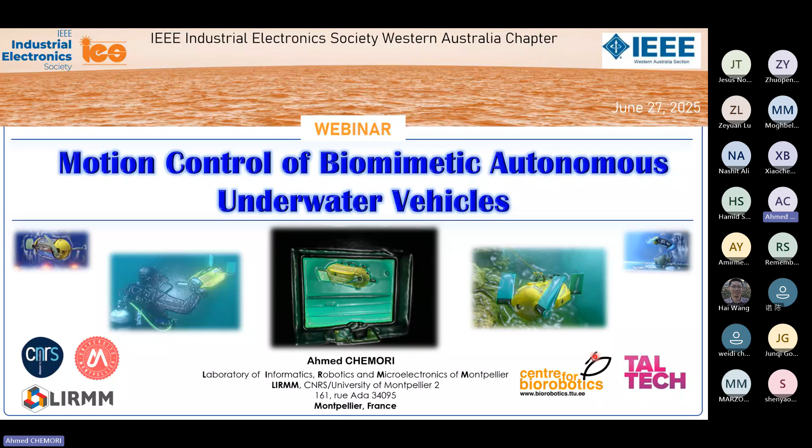The topic of today concerns motion control of biomimetic autonomous underwater vehicles. This work has been done in a joint cooperation between our university, our research lab, and Taltech University, exactly at the Center for Biorobotics in Taltech University in Estonia. So first of all, before starting the heart of the topic of today, let me introduce our research lab.

Then the second thing is that the Faculty of Medicine situated in Montpellier is the oldest faculty of medicine in Europe and maybe in the world. It was founded around 1220. And Montpellier is the seventh city of France, and we have a population of more than 300,000 people. A big amount of this population are students. We have two big universities, and the number of students in the city is more than 70,000.

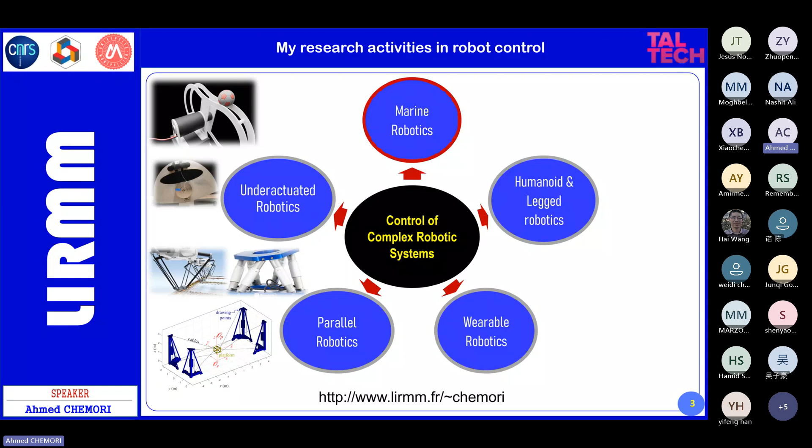Now we have some robotic systems that have fewer actuators than degrees of freedom, and the control problem becomes very challenging because these kinds of systems have internal dynamics which are unstable, and this creates non-minimum phase nonlinear systems, and they are very challenging to control. Here you have two examples of under-actuated robotic systems, the inertial wheel inverted pendulum and the butterfly robot.

The third application, and this is the topic of today, concerns marine robots in general, so surface vehicles and underwater vehicles. I'm interested mainly in control of classical propeller-actuated underwater vehicles like this one, and also in the class of bio-inspired underwater vehicles, and especially we did a lot of applications where we control the vehicle to do a cooperation between the underwater vehicle and the diver. And this is the topic of the lecture of today.

The fourth application I'm interested in: a few years ago, I worked on control of humanoid robots, and the idea is to reproduce human walking on a humanoid robot while managing the interaction between the robot and the ground, the kind of ground, the rough terrains, and so on. And recently, I have started working on this kind of robots. It's the case of quadrupeds working in extreme conditions, like, for instance, the task of making this kind of robot walk in a muddy environment.

And the last topic concerns control of wearable robots or exoskeletons. Also in terms of control, we have a lot of challenges, like we have to manage the interaction between the exoskeleton and the human. We have to manage the fact that the exoskeleton will be worn by a human that we don't know. We don't know, as you can see, the mass of the leg, the inertia of the leg, the friction. We have a lot of parameters and a lot of operating conditions that may change, and we have to take this into account in the control design. So whatever the control system we are interested in, for all those systems, we have a lot of challenges.

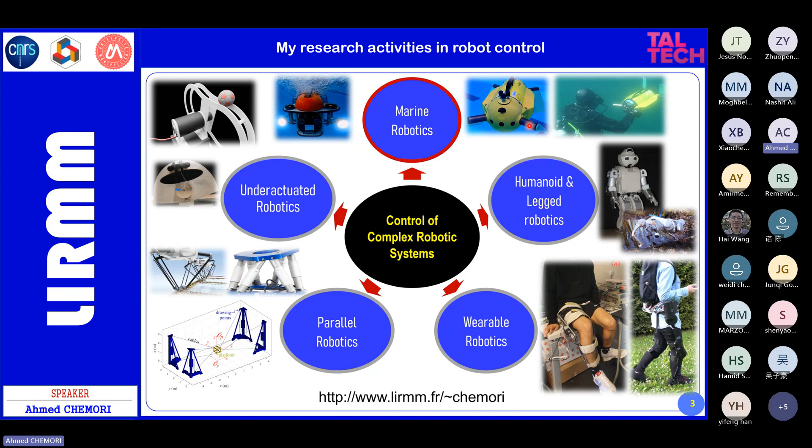This is why I am interested in control of this kind of systems, and also we try to find advanced controllers to control this kind of systems. So starting from now, I focus on the topic of control of underwater vehicles, specifically bio-inspired underwater vehicles. Here is the outline of the rest of my presentation.

We will start with an introduction where I will introduce basic definitions of bio-inspired robotics, and then bio-inspired underwater robotics. Then I will introduce our underwater vehicle, called U-CAT. I will explain from where UCAT has been designed, for which reason, which application, how UCAT is designed, the control system, the control inputs, the outputs.

And the sensors and actuators, and for which kind of applications we developed UCAT. Then the last part concerns the proposed control solutions. Here I will focus on 5 of them. The first control scheme is called priority-based control. Before presenting this control scheme, I will explain why this priority-based control, what is the motivation behind developing this kind of controller.

Then we will move to the second control scheme that we developed. It's called acoustic-based control, and here we will use feedback coming from the hydrophones on UCAT to follow an acoustic system, a pinger, in real time, and we will explain how the controller was designed and how it works.

The third control scheme, in this case, we used another sensor, which is the camera, and we designed a vision-based control. I will explain and show you a video how this control scheme works.

The fourth control scheme concerns data fusion, because when we designed acoustic-based control, we noticed we have some drawbacks and limitations of this control scheme. Then when we designed the vision-based control, we also noticed some drawbacks, and then we got the idea to combine both of them. This is why we called the proposed control scheme data fusion, where we did a data fusion between acoustic signals and images from the camera together in one control scheme.

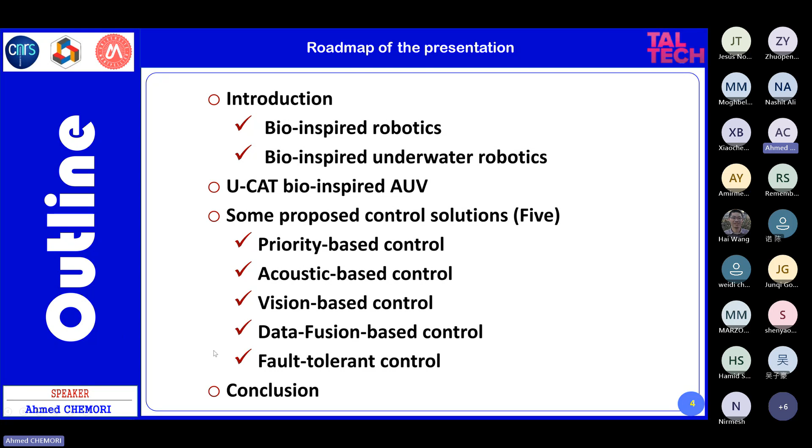And then I will give a short conclusion of my lecture. So let's get started. First of all, let me introduce, as I told you, basic definitions.

What is bio-inspired robotics? It's very easy to be defined. It's an interdisciplinary field between robotics and biology, and it includes mainly 2 broad areas. The first area is the area of biomimetics, and biorobotics modeling and analysis. So this is the first area, and this is the second area.

Let me explain further these two areas. Concerning biomimetics, what is the idea? The idea of biomimetics is to draw inspiration from biology. It means that we want to apply biological ideas and phenomena to resolve engineering problems in robotics. So this is the basic definition of the first area in bio-inspired robotics.

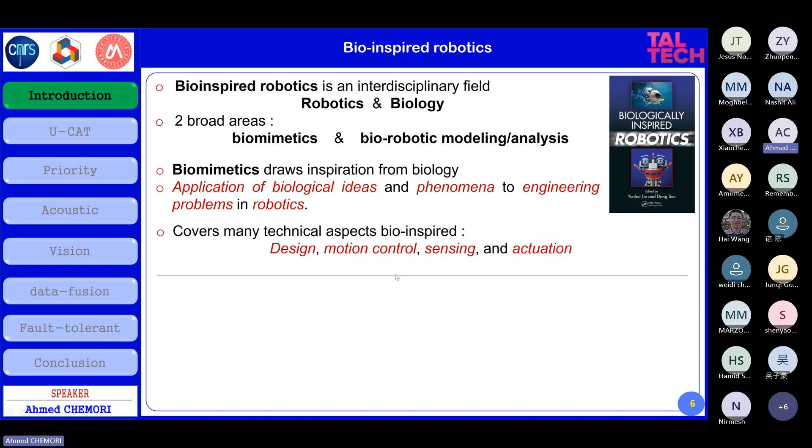And this area covers many technical aspects of bio-inspiration. So we can have bio-inspired design of our robot, we can have bio-inspired motion control, we can have sensors which are bio-inspired, and we can have actuators also bio-inspired. So this is the first area.

Now the second area: biorobotic modeling and analysis. The idea here is the application of robotic models and principles to address biological issues. Here it's the inverse. We will apply robotic models and principles to address biological issues.

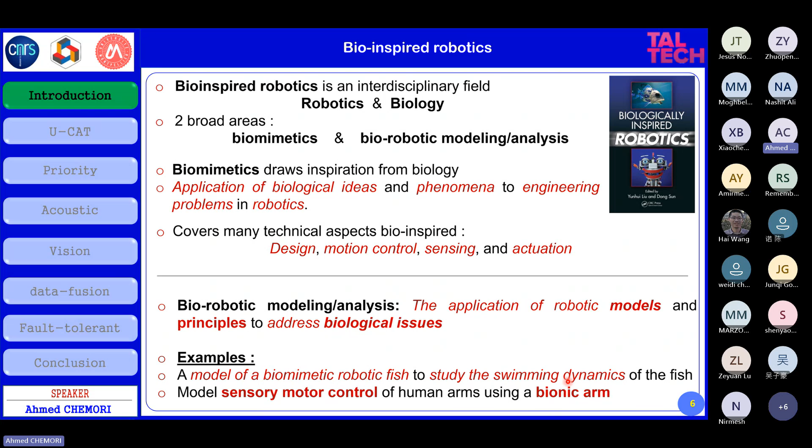Let me give you two examples to understand better. Imagine that you have a model of a biomimetic robotic fish, and we can use this robotic fish to study the swimming dynamics of real fish. So this is biorobotic modeling and analysis. Another example is to model the sensory motor control of the human arm using a bionic arm. So the tool here will be the bionic arm, and the idea is to model the sensory motor control of the human arm.

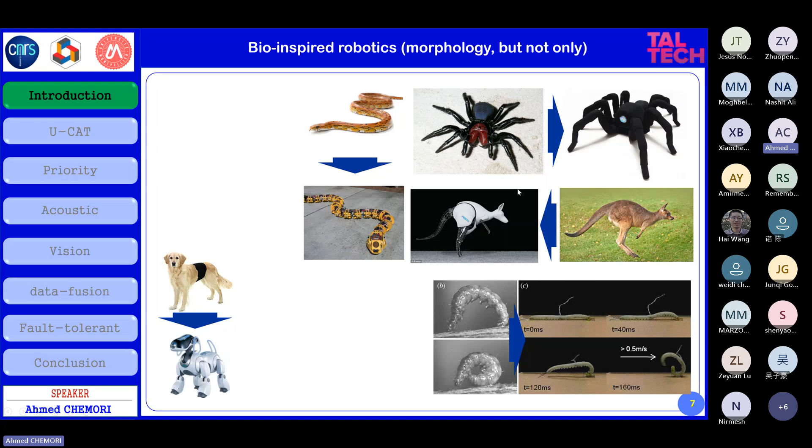We have a lot of examples, like this hopping robot. This is the real kangaroo, and this is the bio-inspired kangaroo. We have the general morphology, which is bio-inspired, but not only, because the actuation system in the kangaroo is based on the Achilles tendon, which is also bio-inspired. We also have some animals without limbs, limbless animals.

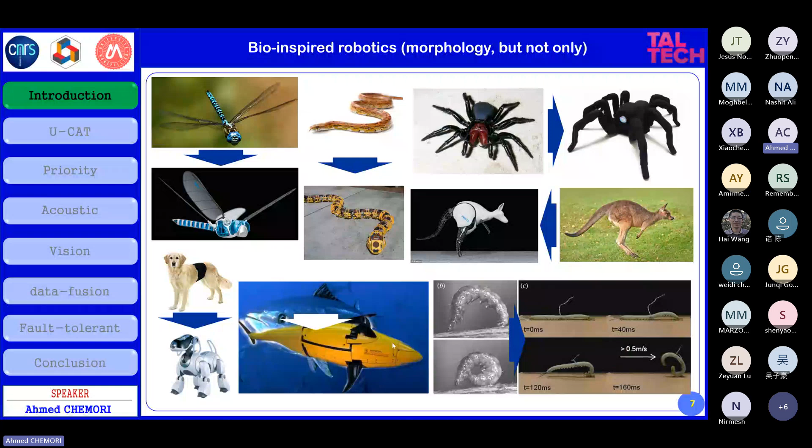We have flying robots, as you can see here. This is a dragonfly, which is bio-inspired. We have soft robotics nowadays, which is increasing in development, and we can see a lot of examples bio-inspired from insects and animals. And we can also have underwater bio-inspired vehicles.

Let me now give a definition of biomimetics. As I told you, biomimetics is one of the fastest growing topics in robotics, and it includes various bio-inspired aspects. We can design an underwater vehicle, or in general any robot, which is bio-inspired from a design perspective or point of view.

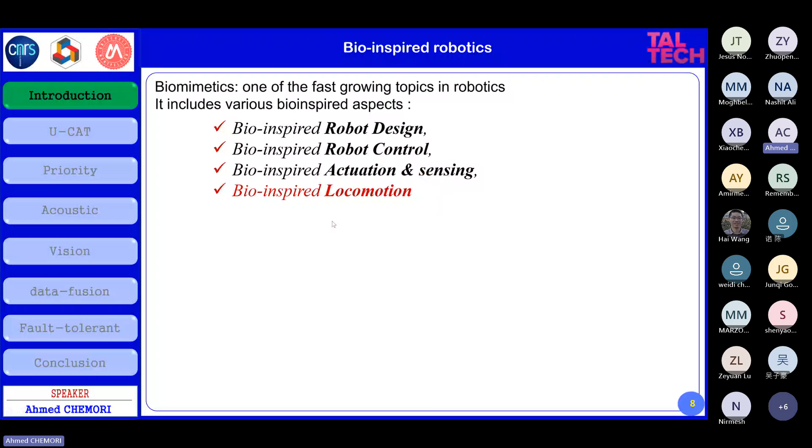We can also have bio-inspired robot control, so the controller itself can be bio-inspired. We can design robots bio-inspired in terms of actuation, in terms of sensing, or the last example here, locomotion. For locomotion, we can use this very simple classification of bio-inspired locomotion.

In locomotion in general, we have terrestrial, aerial, and underwater. Let me introduce the three of them. First of all, for terrestrial locomotion, humans created the wheel.

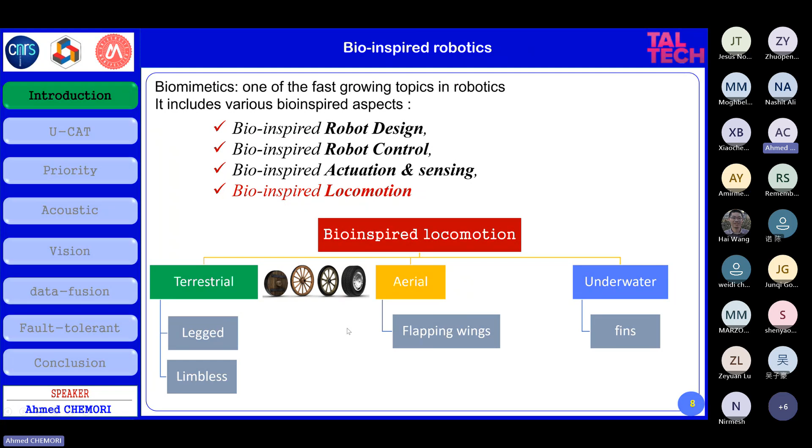Some examples of wheels are shown here, so we can use the wheel to move on the ground. However, if we are interested in bio-inspired locomotion, we forget about the wheel, and in this case we replace it by something else, like legs, as in animals, giving us legged robots.

Here we have an example of a quadruped, a robot with 4 legs inspired from quadruped animals. We can also have terrestrial locomotion based on a limbless design. Here there are no limbs, and by undulation of the body of the snake, or the snake robot, you get motion for this locomotion.

Let me now introduce the aerial case. For aerial locomotion, humans also created propellers, as you can see here with two examples. When we are interested in bio-inspired aerial locomotion, we forget both these classical propellers, and instead we use flapping wings.

Here you can see an example of a robot which is bio-inspired. The robot is equipped with two wings, and the idea is to control the motion of these two wings to control the motion of the body in the air to perform a specific task.

The last example I'll show is the case of today, underwater. For underwater locomotion, as I told you, humans created propellers, slightly different from aerial propellers in that there is an envelope around the propeller, giving better efficiency and better generated thrust or force used to control the vehicle.

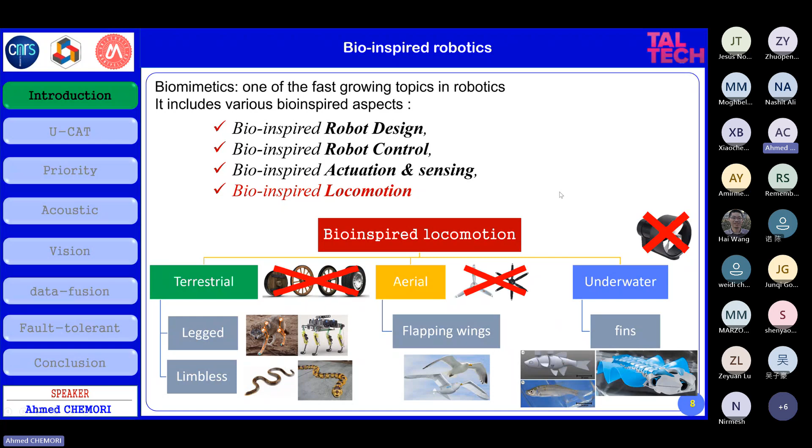After this short introduction, let me now introduce bio-inspired underwater robotics. Before introducing the bio-inspired underwater vehicles, let me just introduce this very simple classification of marine vehicles.

For marine vehicles, we have different kinds listed here. The first class is the class of ROVs, which stands for remotely operated vehicles.

For this kind of vehicle, we have the control system that stays on the boat. The human manipulates the control system, and the underwater vehicle dives to a certain depth. The key idea is that there is a cable, also called the umbilical, relating the underwater vehicle to the control system. You can see part of the cable here. So they are linked through this physical cable.

Why do we use this cable? We use it for two reasons. First, the control actions are computed in the control system on the boat, with the human manipulating it, and these control actions are sent to the actuators of the underwater vehicle through this cable. So in one direction, we send the control actions to the actuators or propellers of the underwater vehicle.

This umbilical is also used for another reason. The underwater vehicle is equipped with several sensors, and to get the measurements from the sensors on board the vehicle, we use this cable, or umbilical, as well.

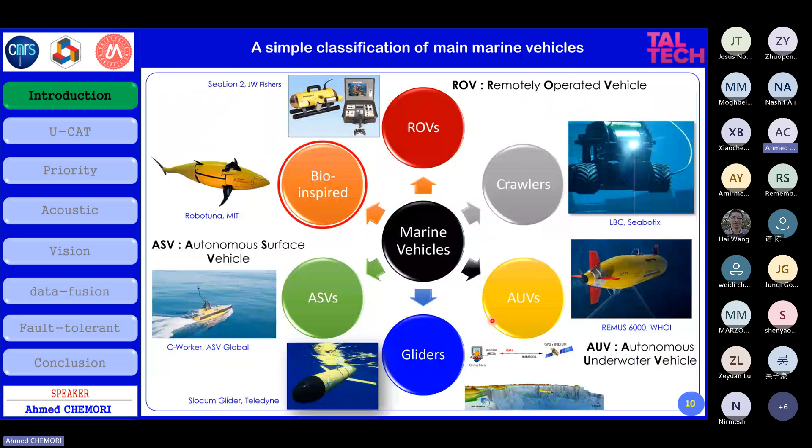However, if we look to nature, let me introduce four examples: the first is the sea turtle, the second is the sea snake, the third is the manta ray, and the last is the flying fish.

If you look at sea animals, none of them use propellers. Instead of propellers, the turtle uses 4 fins. By moving these fins, you can see how the turtle moves inside water, able to move in all directions with 6 degrees of freedom. It can even avoid predators by changing its motion abruptly.

Sea snakes, by undulation of the body, can have very smooth motion, and they can go inside confined environments.

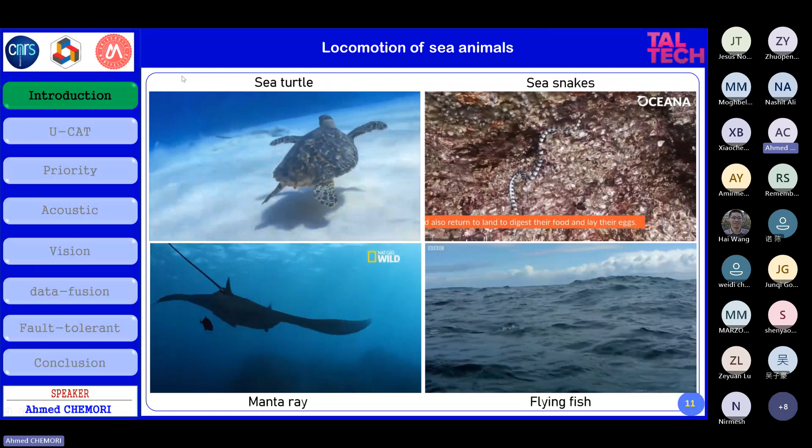The third example is the manta ray. Here the actuation is slightly different from the turtle because it's not using oscillating fins, but undulating fins. The last example, the flying fish, uses fins for both underwater movement and for flying. Now the idea is: why don't we design robots inspired from these sea animals?

Let me introduce the basic definition of bio-inspired underwater vehicles. A bio-inspired underwater robot is a robot designed based on biological ideas. As mentioned, it can be based on the design itself, the actuation system, the sensing system, and so on, and it's designed to address technological problems in robotics.

So what are the main features of a bio-inspired underwater vehicle? First, they may have a bio-inspired shape. As you've seen in some examples, the propulsion or actuation system can also be bio-inspired, as can the sensing and sensors.

We can find a lot of examples inspired from sea animals, including fish, turtles, eels, jellyfish, snakes, crabs, and so on.

Some of them, like snake robots, are designed based on a modular conception, because it's easier in this case: you construct a module, duplicate it, connect all the modules, and then control them to generate the motion of the underwater vehicle.

Some potential applications where these bio-inspired underwater vehicles are used: data collection, for instance measuring water quality, and underwater pollution detection, such as detecting pollution in a pipeline.

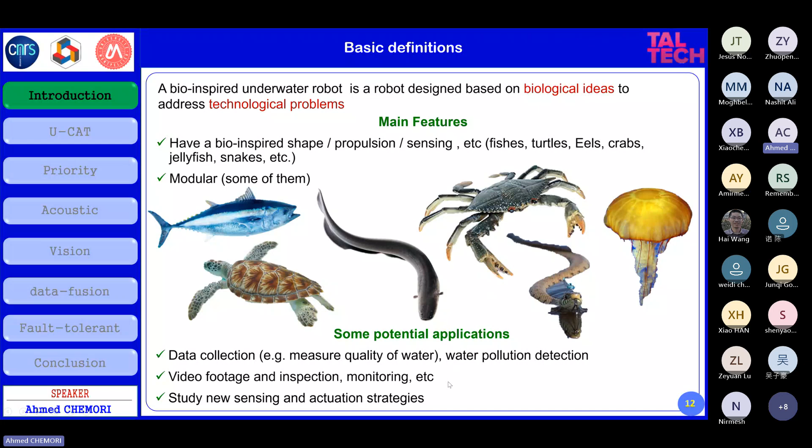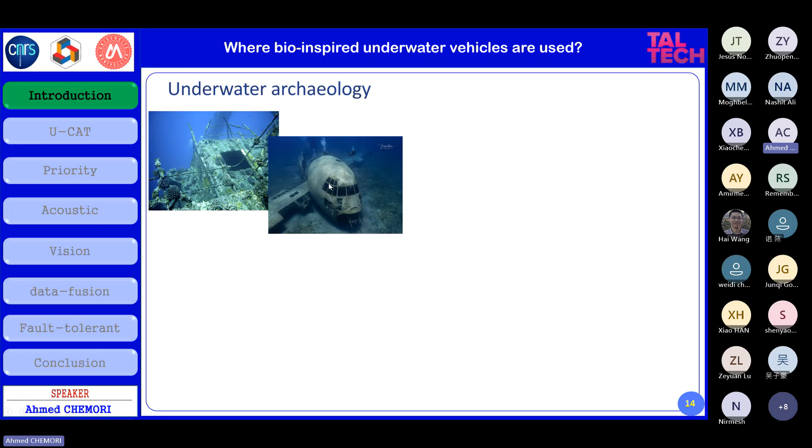The first application, as you can see here, is underwater archaeology. It means you have to go inside a shipwreck or airplane wreck, as you can see, inside water. It's very challenging to do this task because of a lot of challenges that I will explain later on, because actually in our vehicle U-CAT, we are interested in this specific application.

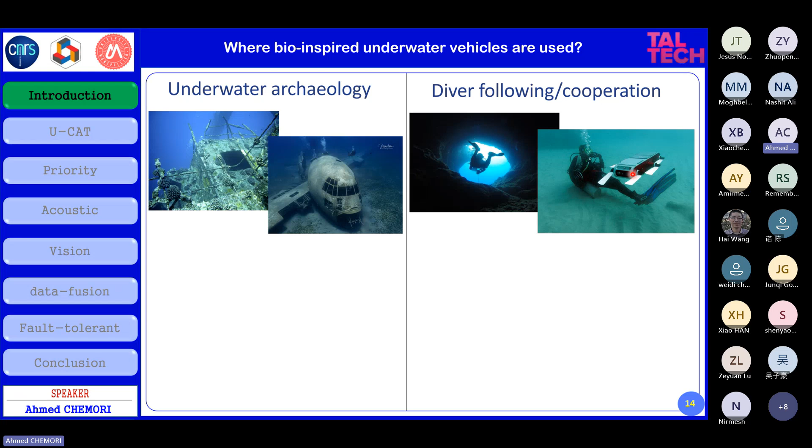A second application can be a cooperation between the bio-inspired underwater vehicle and a diver. It can be the cooperation or just simple following, so the diver is moving and the underwater vehicle should follow the diver in real time. This is the second application.

The third application is for fish monitoring and aquaculture applications. For instance, here you have a population of fish, and you can have a lot of problems. One simple question we may ask is how we can know the number of fish inside a specific area, how we can count them. Counting the number of fish is a problem, and as a solution, a bio-inspired underwater vehicle can be used to study the motion of the fish with less disturbance. Maybe we can design a bio-inspired underwater vehicle, like a fish-like underwater vehicle.

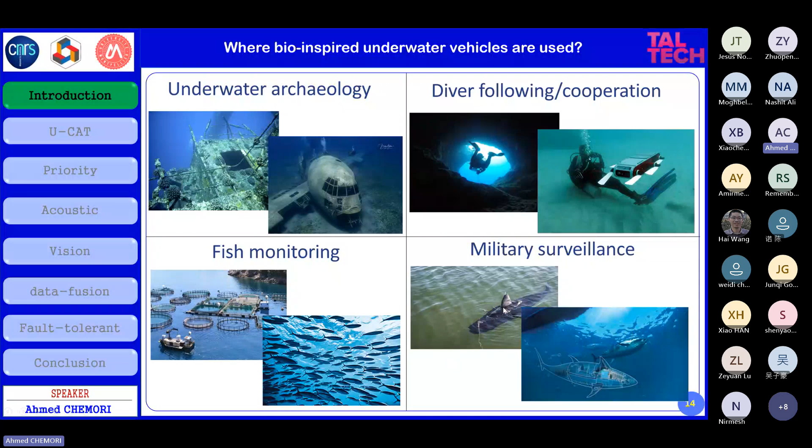The last application is for military tasks, like military underwater surveillance, for instance. We can also use bio-inspired underwater vehicles for this. After this introduction of the different applications, let me show you some examples of existing bio-inspired underwater vehicles.

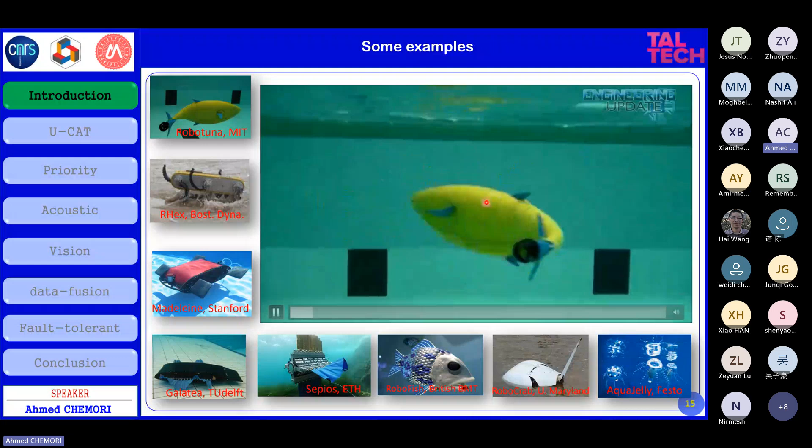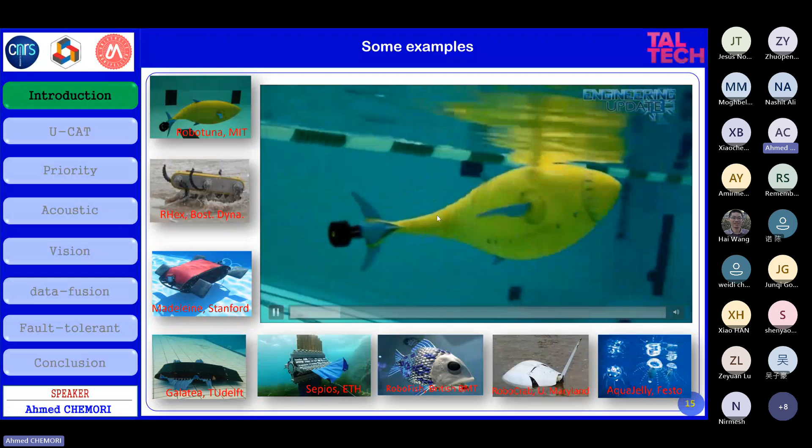As you can see, the first one is called Robotuna. Robotuna has the morphology of a fish, as you can see, with different fins and so on. You have to notice that the tail is flexible, and the tail is controlled to move to the right and to the left. Also, something we can see is the propeller at the end of the tail of this fish.

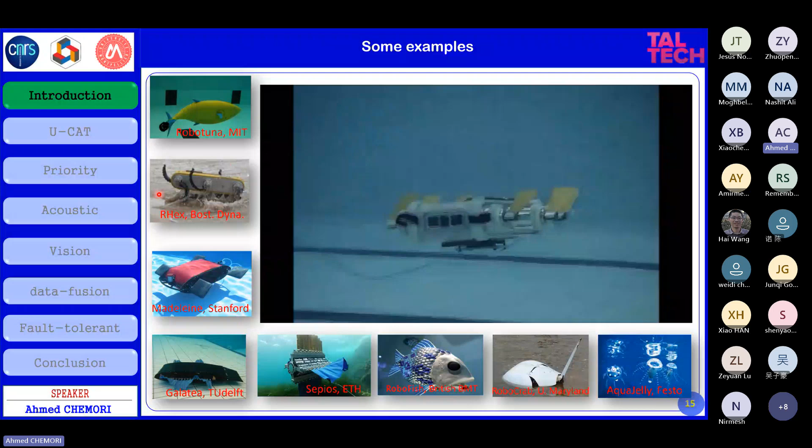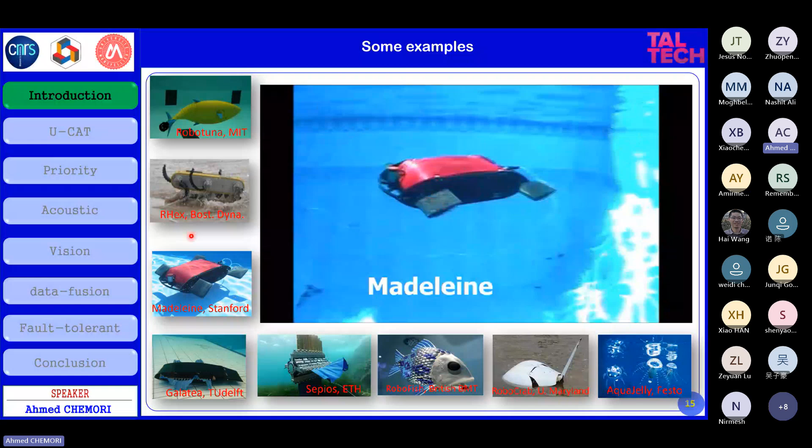The second example, from Boston Dynamics, is called RHex. RHex is an underwater vehicle with 6 propellers, and the propellers here are not the classical propellers, but it uses 6 fins. The next one, Madeleine, is from Stanford University, same as the previous one, but here it uses 4 fins, and they are rigid fins, controlled to control the motion of the underwater vehicle.

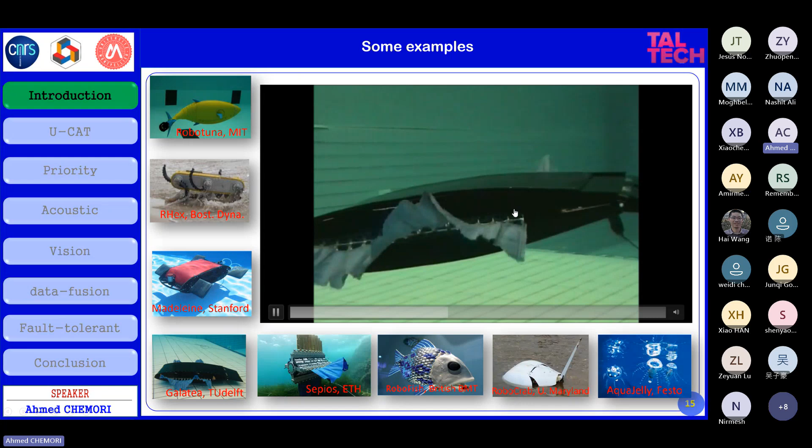The next one is called Galatea from Technical University of Delft in the Netherlands, and this is what I explained to you before, the undulation fins. The fins are undulating like that, and then if you want to control the motion of the vehicle, you want to go faster or go slower and so on, you may change the parameter of this undulation.

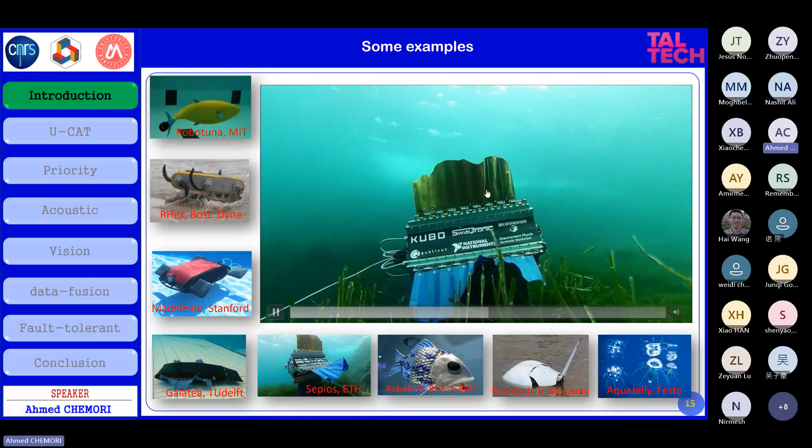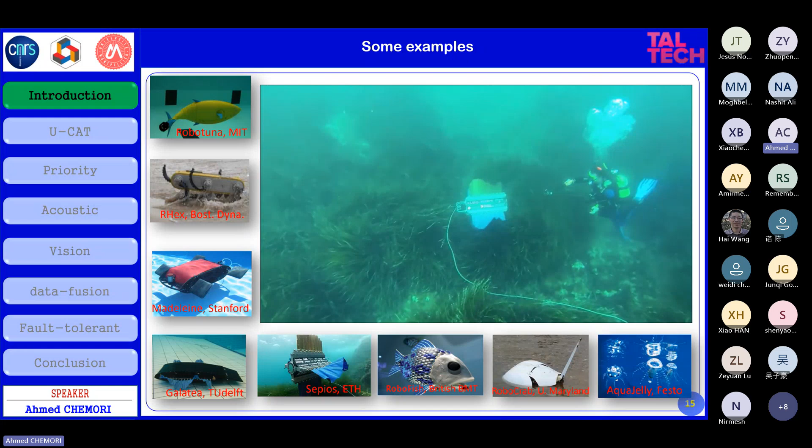Here, the next one, Sepios, also from ETH, the same concept, and it uses 4 undulating fins. And as it will do the same, you want to go faster or slower, you can change the parameters of oscillation of these fins. It can be like the frequency of oscillation, or it can be also the amplitude. So these 2 parameters can be used to control the motion of the vehicle.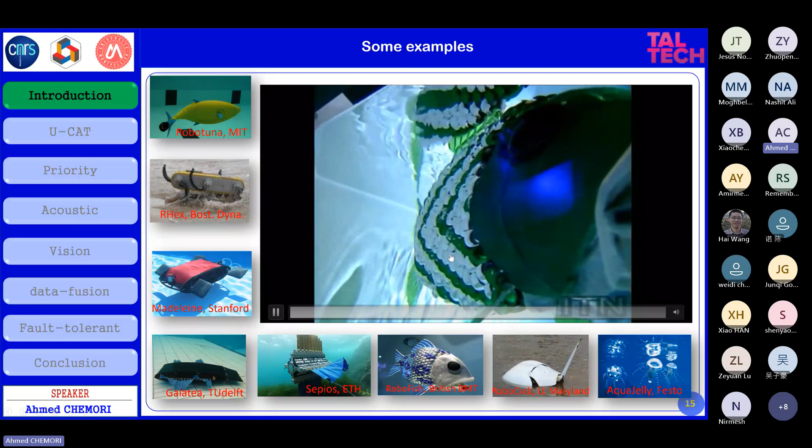The next one, RoboFish, here, as you can see, it's like Robotuna. It has the morphology of the fish. It has a tail. The tail is flexible also. It can move. It's controlled to move to the right and to the left to push the vehicle in the desired direction. And then depending on the application, you may put a camera here, for instance, to take pictures or take videos.

And the next one is RoboCrab, and this is an amphibious underwater vehicle, because as you can see here, it is able to walk on the ground, and it is also able to swim or to dive inside water. This is why it is amphibious. And in terms of control, in both mediums, it's not the same technique that we may use.

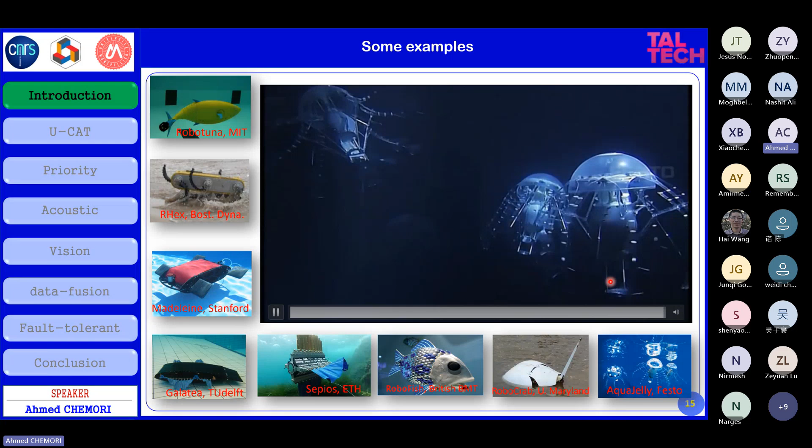Here, the last example, AquaJelly from Festo. This is a bio-inspired underwater jellyfish. And as you can see, its actuation system is very simple. Here, an actuator that moves to the top and the down, moving the different fins of the vehicle to move inside water. Now, let me move to our underwater vehicle.

So our underwater vehicle, as I told you, it's called UCAT, and UCAT was designed a few years ago at the Center for Biorobotics in Estonia at TalTech University within this European research project called ARROWS. So the motivation behind this design was mainly for archaeological applications. So the idea is to go inside the shipwreck and take pictures, videos, and do the inspection of a shipwreck, for instance. So this is the main application of UCAT.

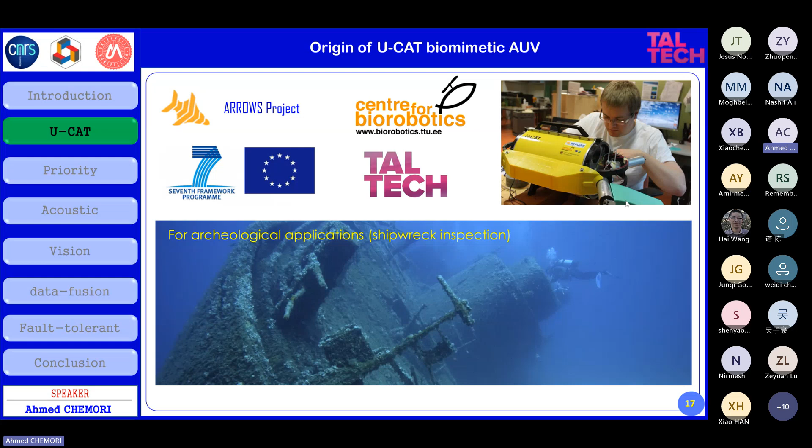So what does this mean? What are the consequences if you are interested in a shipwreck inspection? And what are the constraints that you have to take into account in the design and control of this underwater vehicle in its actuation system because of this specific application? I will say a few more details about this.

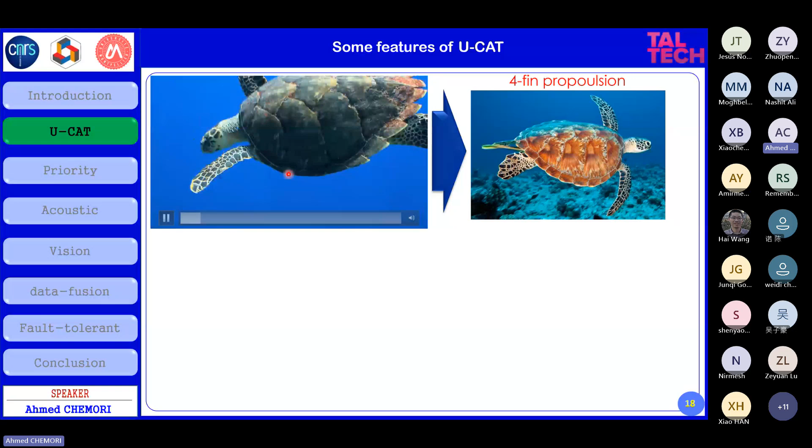So first of all, UCAT is bio-inspired. We got it inspired from the turtle. As you can see, a turtle uses 4 fins as a propulsion system, and we want to do something bio-inspired, turtle-like. So we don't want to use classical propellers for certain reasons that I will explain, and we designed UCAT, and this was the obtained result of the design.

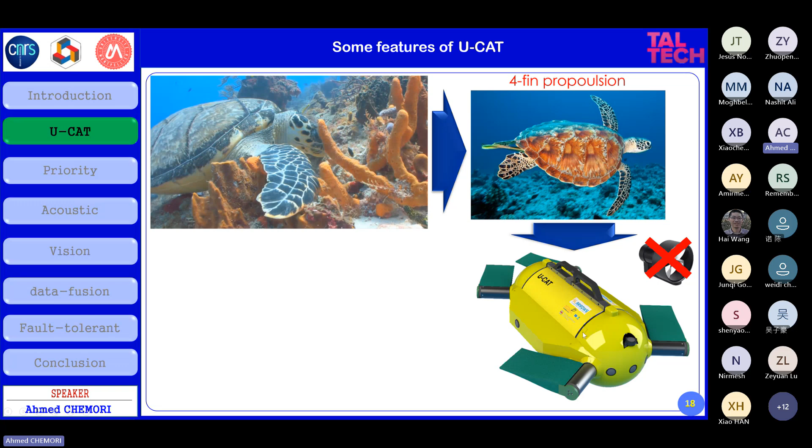As you can see here in yellow, the body of the vehicle, and in the green parts are the fins of this underwater vehicle. And the fins are actuated by motors inside the vehicle, and then we control the oscillation of the fins to control the motion of the underwater vehicle. Some technical features of this underwater vehicle.

First of all, as I told you, why we designed this vehicle, why we have been interested in controlling this vehicle. Mainly the targeted application was underwater archaeology, and specifically we want to do inspection. So the robot is not equipped to do underwater manipulation. It's equipped just to do underwater inspection. And mainly we can use the camera or the video to identify objects of interest.

In the design itself, as I told you, regarding this underwater archaeology application, we had a lot of constraints. And one of the constraints is the size of the underwater vehicle. So the vehicle should be small, because we have to go inside the shipwreck, a confined environment, and we have to pay attention regarding this. If you design a big underwater vehicle, it will not be possible to go inside the confined environment. This is the first reason. The second one, it should be highly maneuverable to change the direction, to change the orientation very quickly.

So this is needed also for this kind of application. Then another constraint regarding the design of the vehicle concerns the actuation system. As you can see here, we don't want to use classical propellers. Why are classical propellers not a good solution for this kind of application? Because they restrict the visibility near the bottom. I will show you a video to show concretely the difference between actuation based on a propeller and actuation based on fins in the next slides.

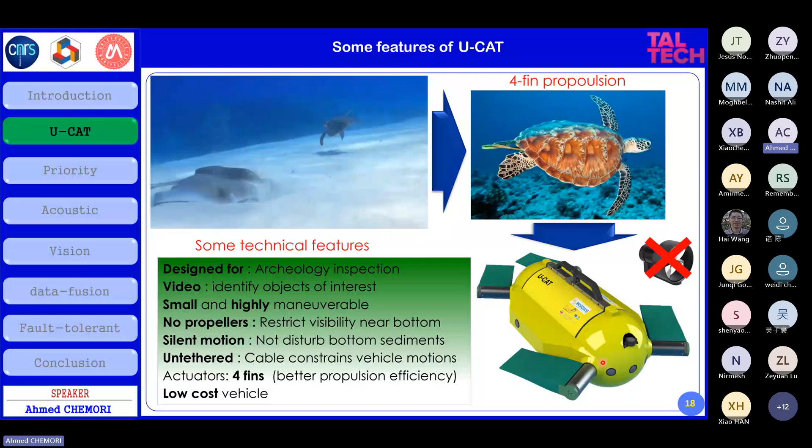In this case, we have an AUV. It's an autonomous underwater vehicle, and it is fully embedded, fully autonomous. In terms of actuation, as I told you, we have 4 fins, the green parts here, actuated by motors, and I will give you more details about this in the next slides. Now let me introduce the actuation and sensing of this underwater vehicle.

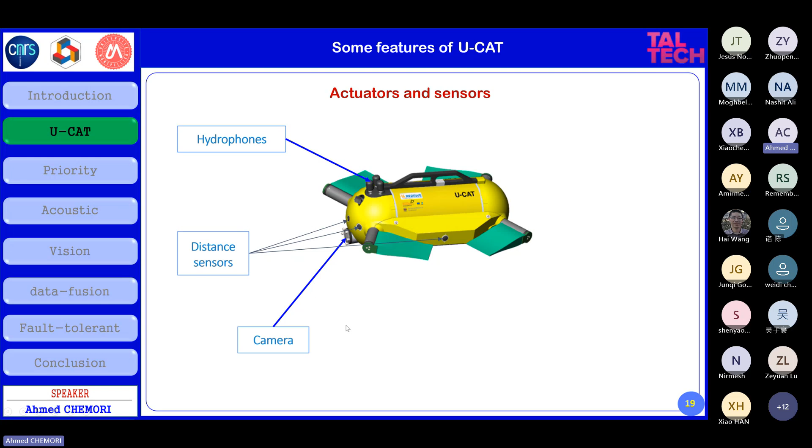In terms of sensing, the robot is equipped with 3 hydrophones. Why hydrophones? Hydrophones are used for underwater acoustic communication. I will show you some scenarios where we did acoustic-based control. We used these 3 hydrophones to control the underwater vehicle. I will give you more details in the next slides. Then the vehicle is equipped with some distance sensors. It is equipped with a camera to take videos and pictures of objects of interest, and also different kinds of sensors.

We have the IMU. The IMU is the inertial measurement unit, and it's used to measure the orientation of the vehicle: roll, pitch, and yaw. It is equipped also with other sensors, like for the depth, which is a state that we need to control and measure in real time. In this case, we use a pressure sensor to measure in real time the position of the vehicle underwater, and other sensors like temperature or humidity sensors.

In terms of actuation, we have 4 DC brushless motors used to actuate the four fins of the underwater vehicle. We also have inside the vehicle a buoyancy control system. We can change the buoyancy to go to the surface or to go down. In the actual controllers that we proposed, we didn't use it yet, but the initial design of UCAT includes this buoyancy control system.

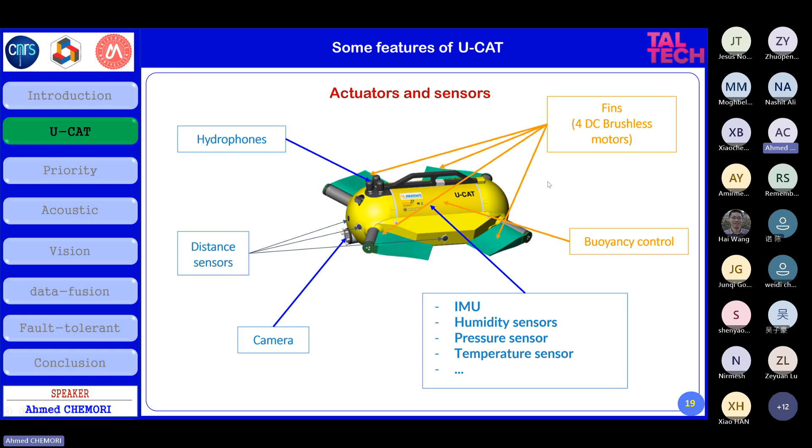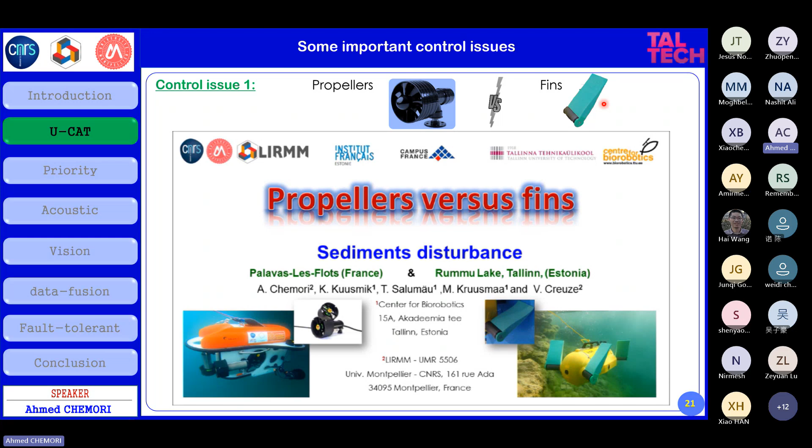Now, what we have proposed as control solutions. Let me show you, first of all, some control issues. The first control issue, as I explained before, is the actuation of the system itself. We want to control some organs in the vehicle. We had the choice between using classical propellers or using fins. Let me show you our design, why we chose fins instead of classical propellers. The video here compares classical propellers to fins.

Here we have another underwater vehicle, an ROV, and it uses classical propellers. We did this diving task near the harbor, and see here the sediment disturbance. If you use a camera here, you cannot see anything. This is very bad for camera-based underwater inspection, and this is the reason why we don't use classical propellers. Instead, we use fins.

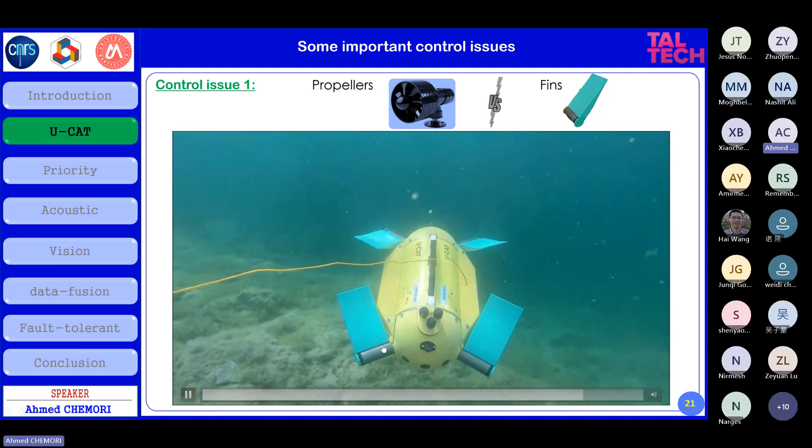In this sequence, as you can see, UCAT is diving very close to the bottom, to the seafloor, and there is no sediment disturbance, because the motion of the fins is not disturbing the sediments. This is the first thing to keep in mind. We are using fins to avoid disturbing sediments, but not only; we have other reasons for using fins, like energy consumption. We never proved that this kind of underwater actuator is better in terms of energy than propellers, but it's possible to prove this.

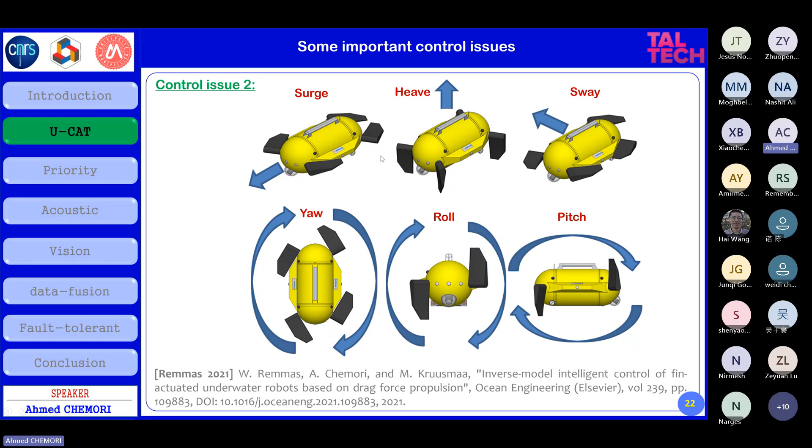And the question that I may ask: how can we control 2 or 3 or 4 degrees of freedom at the same time, because here I illustrate the control of each degree of freedom alone. If I want to control the surge and the heave at the same time, how will I orient the fins and how will I control the fins to go in the good direction to follow the predefined trajectories? And this is a challenging control problem.

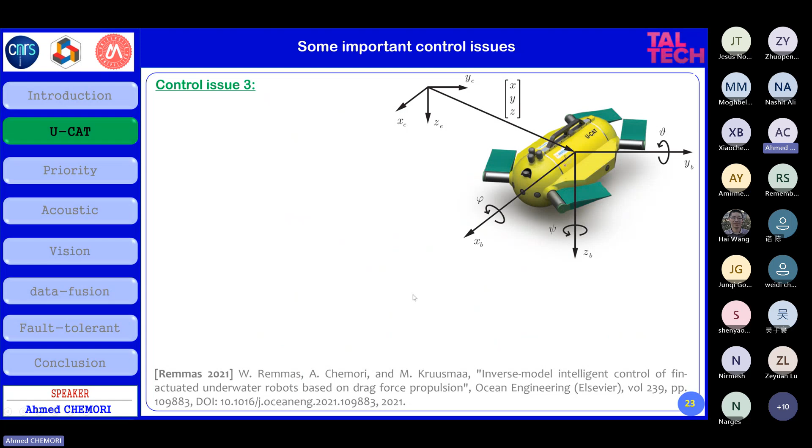The third control problem concerns the fins themselves, because for a classical propeller, we can find in the literature a very nice, precise model of these underwater propellers. However, for our case, using fins like that, the model may be very difficult. The model of the vehicle itself is easy; we can find it in a textbook of marine robotics, the model of an underwater body like that of the vehicle. However, the actuation itself using fins is very difficult.

Very difficult, why? Because actually the fin itself is not rigid, it's flexible. And if you want to take in this flexibility to have a nice, precise model, you need to use, for instance, the finite element method. But the consequence is you have a very precise model, but its complexity will be very huge, and it will not be possible to integrate this model in real time for the control of the vehicle. However, we can use a very simple model by neglecting a lot of things, neglecting flexibility, for instance. You have a very simple model, but it will not be very performant.

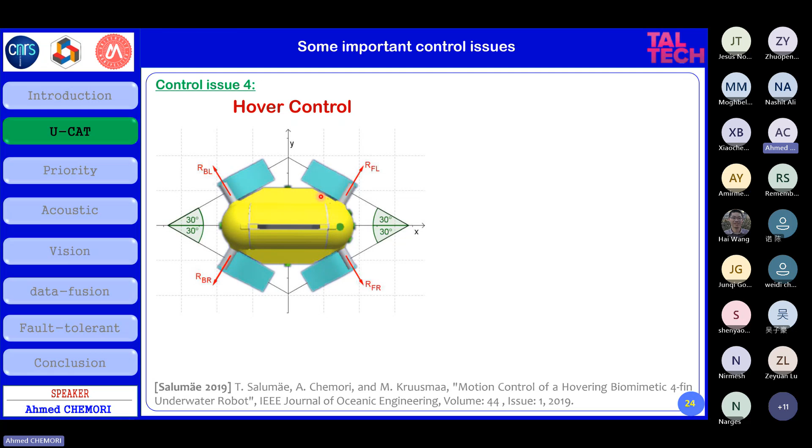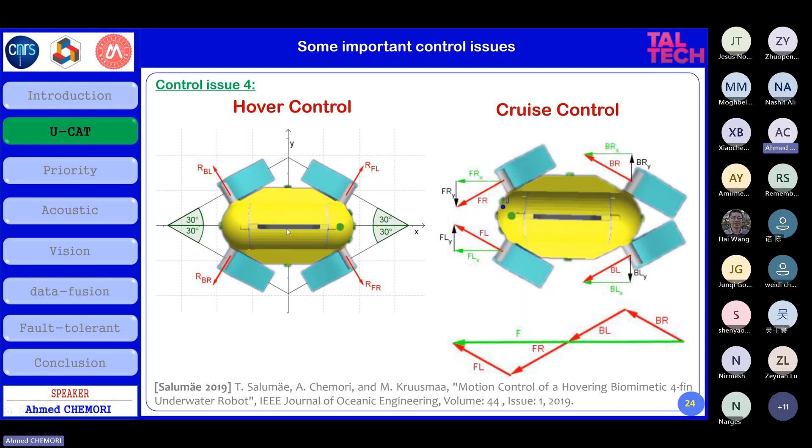The cruise mode is used mainly to move for long distances, like for search, because the generated force or thrust from all the fins, rear and front, is bigger. However, the hover mode is well suited if you want to stay around a specific position, like for dam inspection, for instance—you want to stay in front of the dam to take a picture or video, and remain stable around this position. In this case, the cruise mode is not possible, since it's designed for continuous motion along the surge. However, with hover mode, we can stay around a specific position with precision.

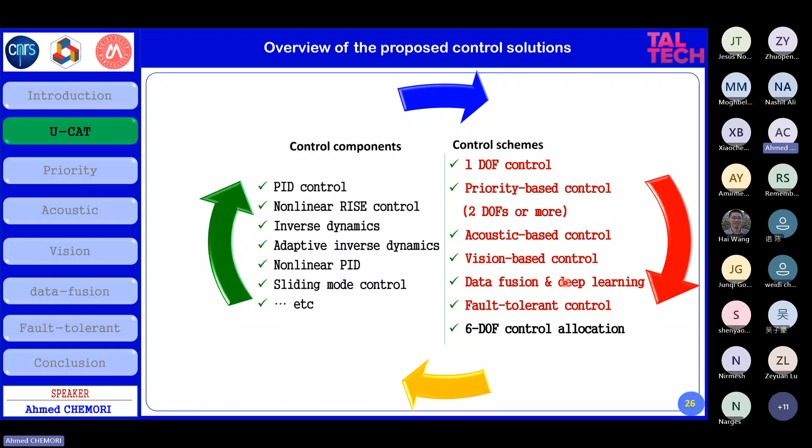Now, in terms of control solutions, we designed several approaches. We started with control of 1 degree of freedom—designing different controllers, which is not very difficult. Then we tried to tackle controlling more degrees of freedom, starting with priority-based control that enables controlling 2 degrees of freedom or more. After that, we used the sensors on board the vehicle for feedback control, including acoustic signals, vision-based signals, data fusion between them, and finally fault-tolerant control.

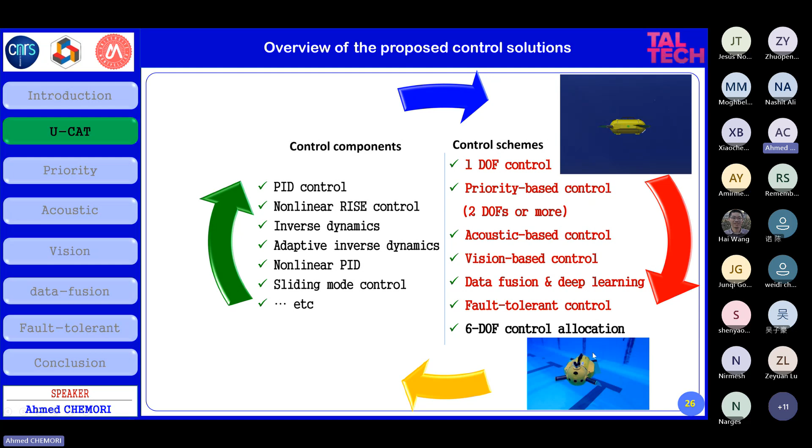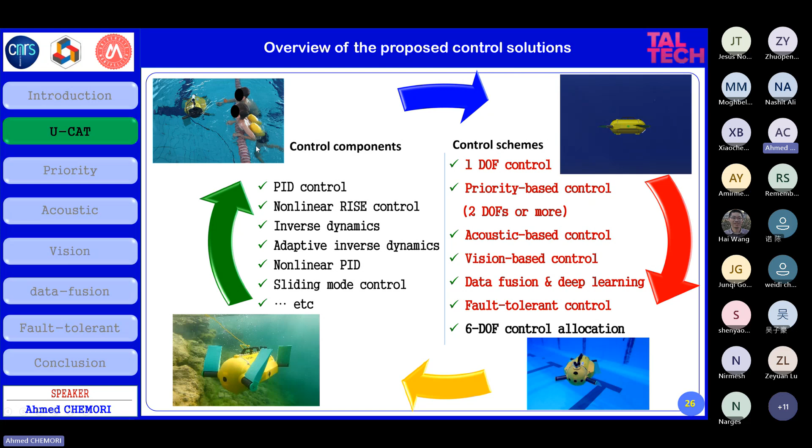We did another work, currently under progress, where we control all 6 degrees of freedom. We first did simulations to validate the control schemes in a robot simulator, then conducted experiments in a controlled environment in the pool, and later in open water. To show that the robot is human-friendly, we organized a day for kids, and they were swimming near the robot without any safety problems.

Now let me show you some of the experimental results we obtained. First, this is control of the vehicle using a joystick—an open loop control without any controller inside, just a human manipulating the joystick to control the motion of the vehicle. Here you will see an illustration of the different degrees of freedom, the motion, the different orientations, and how the vehicle moves, especially the consequences of this kind of open loop control.

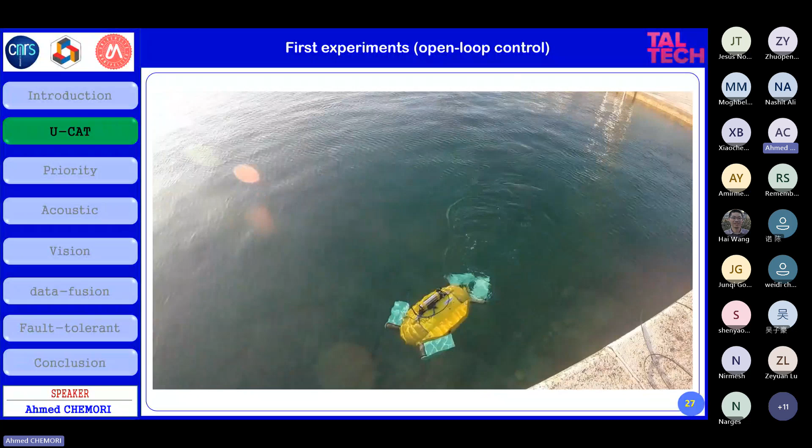Look here, this camera is on board the vehicle, and when the vehicle is moving, you can see that the roll is not very stable. The roll is not very stable for a reason. Here, in the illustration of the different degrees of freedom, we are moving along the y-axis.

We change quickly, the orientation is highly maneuverable. Now we are rotating around the z-axis, for instance, by moving the fins of the vehicle, and we have different illustrations. Now, the problem of the roll, why the roll is moving like that, as you can see, because actually we have the fins, the right side, the left side fins.

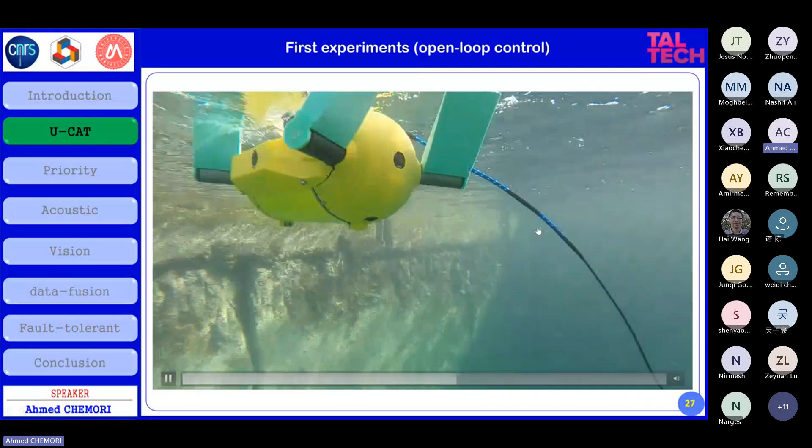Here's, as you can see, the human using the joystick, controlling the vehicle, and you can see the obtained motion. And as I told you, the problem of the roll instability is coming from no synchronization we did between the right and left fins. So without any synchronization, the problem is we obtain a roll of the body of the vehicle which is not stable in the roll degree of freedom.

Here you can see that the fins of the vehicle are flexible. As you can see, they are not rigid, so they are flexible, and this is the obtained motion.

So after this open loop control, let me show you a closed loop control. We started with the control of 1 degree of freedom. As you can see here is the control of the depth, and we did the experiment in a swimming pool.

As you can see, the perfect motion of the vehicle vertically to the top and to down also, by controlling the fins of the vehicle. And as you can see, the roll of the vehicle is very stable. The reason behind this is that we did a synchronization between the right and the left fins of the vehicle. This is how we obtained this stable vertical motion.

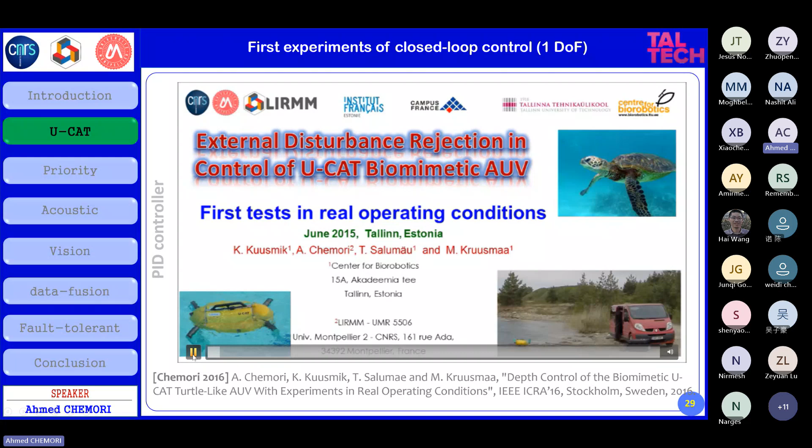So after controlling the vehicle in 1 degree of freedom, we started doing experiments first in open water. We did some experiments in Estonia here, as you can see, and you will see that the working conditions or operating conditions are much more challenging than the previous case in the swimming pool.

As you have seen, the visibility was very good in the pool. However, here the visibility, as you can see, it's not so good. We have different particles inside the water, the visibility is not good, and so on.

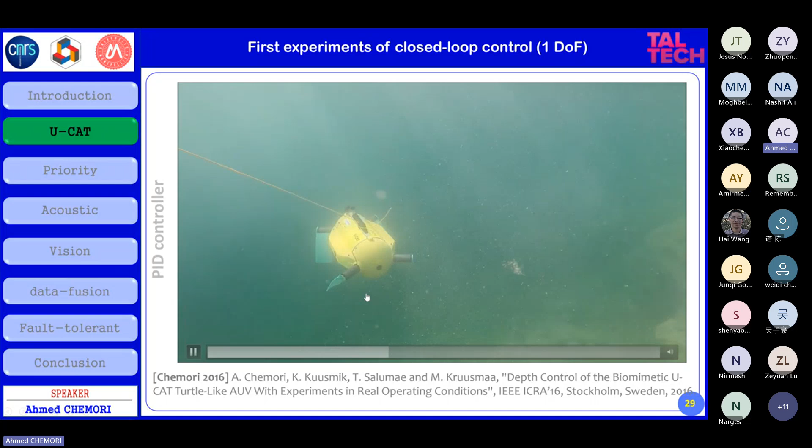So we go from the surface to a certain desired depth. If you want to go down, you orient the fins in this direction and control the oscillation. If you want to go up, you have to orient the fins down like that. If you arrive at the desired depth, which was around 2 meters, the orientation will be horizontal. Horizontal orientation of the fins means that the tracking error on the depth is near zero.

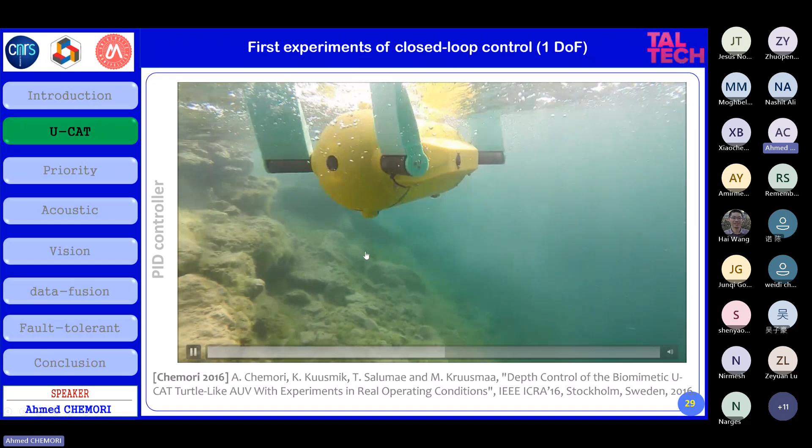Here we disturb the vehicle, applying first an external disturbance. The yellow part you see here, the yellow cable, is not umbilical, pay attention. It's just a wire without any electronics inside, no control signal, nothing. It's just to disturb the vehicle, the first reason, and the second reason is to avoid losing the vehicle inside the lake where we did the experiments.

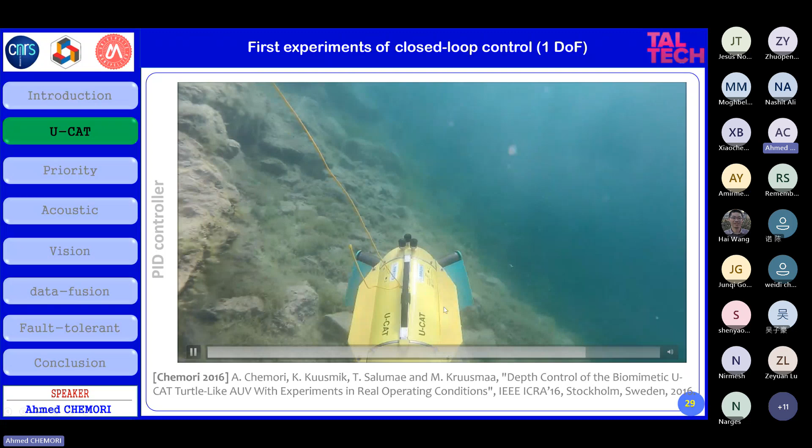So we apply this disturbance here. It goes back around the desired value, and this is just to show that the controller is able to reject this external disturbance.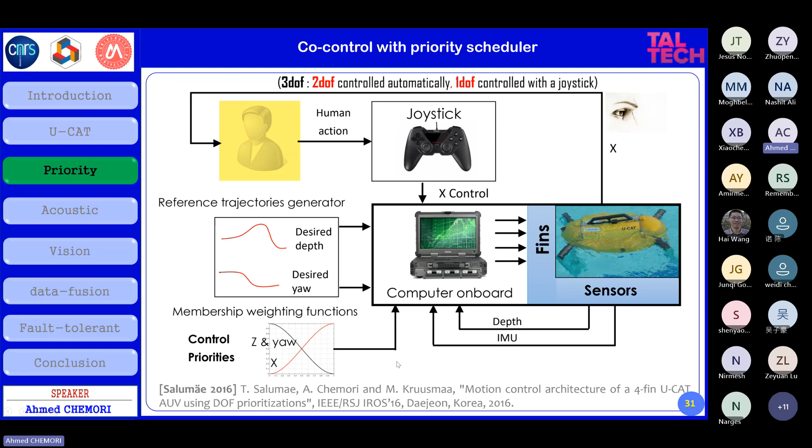For the controller, we use nonlinear feedback gains that are summarized here. The obtained results show a trajectory tracking, this is the trajectory tracking that we designed here, as you can see.

So we did 3 control modes. The first one is manual control, where we ask the human to follow this predefined trajectory approximately, and the human is manipulating everything - the robot is manually controlled by the human. Then we try to reduce the intervention of the human. In this case we add a depth autopilot, meaning the depth is controlled automatically, and the human is controlling just the yaw. The last one is the depth and yaw autopilot, so both are automatically controlled. As you can see, the tracking is much better in the third, autonomous case.

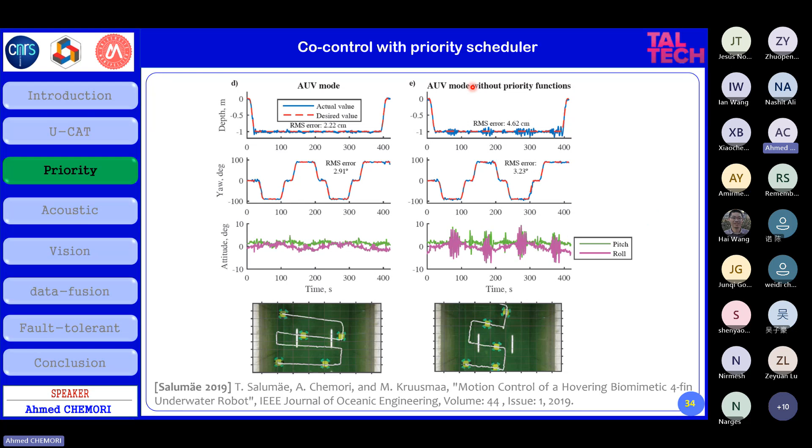This shows what happens if we add or don't add these priority functions. Without the priority function, the tracking error is worse than the case where we take them into account.

Then acoustic-based control - the idea is to use the 3 hydrophones of the underwater vehicle to follow a pinger. We did different scenarios: a static pinger, then a moving pinger. We give the acoustic pinger to the diver who will move, and based on this measurement, we try to follow the diver in real time. Let me show you the obtained results for this scenario.

So here we ask UCAT to follow the diver. The diver is moving here. We use the measurement from this pinger - it's the yellow part held by the diver. And the diver is moving. As you can see, UCAT is controlling the depth and the yaw and the surge to follow the diver in real time. The diver is moving and UCAT is following the diver in real time, thanks to this feedback from the acoustic signal.

However, what we noticed here is the problem of precision of tracking, because we cannot have good precision of tracking using this acoustic signal.

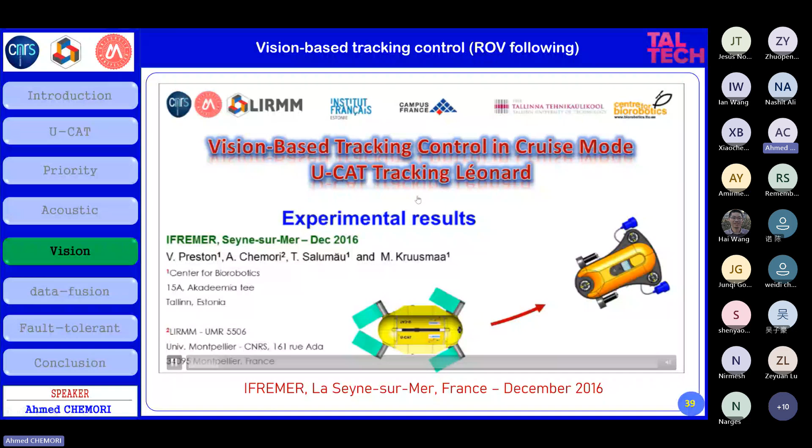Then we tried another measurement, which is the camera. Based on the camera, we designed a vision-based tracking controller. Here, the scenario is an underwater vehicle moving, and UCAT is using just the camera to follow this moving underwater vehicle. The big challenge here is we need to keep the first vehicle, the target, inside the field of view of the camera.

The big challenge is if the first vehicle is turning to the right or the left, we may lose it very easily outside of the field of view of the camera, and in this case we cannot do anything. This is why we need to design a controller that's very reactive, such that when the target starts moving to the right or the left, we have to turn quickly to avoid losing the target in real time, and we succeed in doing this tracking. So it has good performance in terms of precision, with the camera.

However, the problem is this: if it is outside of the field of view, or if the target is far away from the vehicle, or if the visibility is not good, the camera is not suitable.

Then we designed the data fusion controller, and here we tested using both. It means that if we can see the target in the field of view of the camera, we'll use both the acoustic signal from the pinger and the camera. If the target is outside the field of view, or far away, or the visibility is not good, we'll rely only on the pinger, the acoustic signal. Then you can switch between them depending on the situation in real time.

Here we tried the following: we try to follow the diver, as you can see, and once the diver is outside the field of view of the camera, we stop the experiment because we cannot continue. We don't have any further information. So this is the visual tracking.

The last scenario here is fault-tolerant control. In this work, we suppose that one of the fins is not working. We stop one of the motors and keep just three working, and we try to follow an elliptical trajectory like that here, combining the PID controller and the sliding mode controller.

Just one note regarding the tags you can see at the bottom of the pool: they are used to measure or localize X and Y, so the surge and the sway, the position in X and Y of the robot. This is why we use these tags and the camera of the vehicle, so we can know the XY position of the vehicle. The depth and the three angles are measured using the pressure sensor and the IMU.

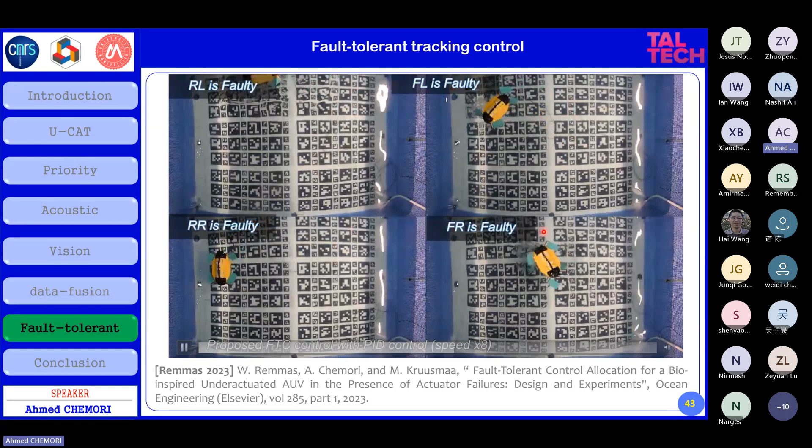And here we do the tracking. Now for control allocation with the PID, it depends on which fin is faulty: the rear left, the rear right, the front left, or the front right. You can see we repeat the same tracking scenario. For instance, take this scenario: it's not working at all, because we ask the robot to follow this elliptical trajectory, but it stays in the middle. So it's not possible to control the vehicle. It's very challenging, and this is using the PID controller.

We then repeat the four scenarios using the sliding mode control, and we'll show the results here. The obtained performance is much better than the previous case with the PID. As you can see, even in the fourth case the tracking is not perfect, but it's still working better than PID.

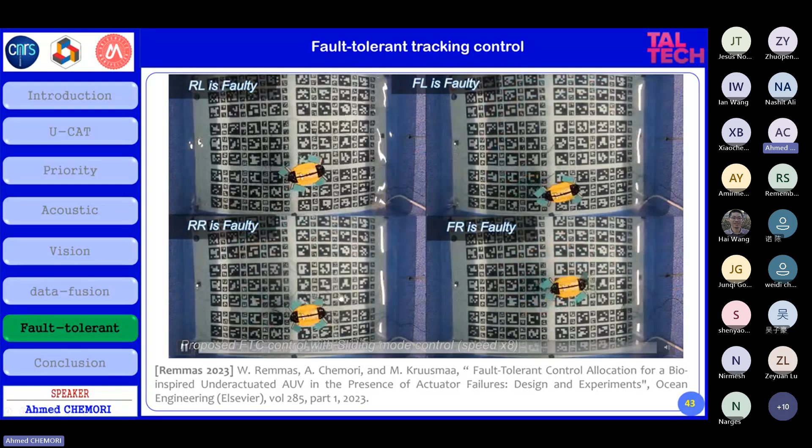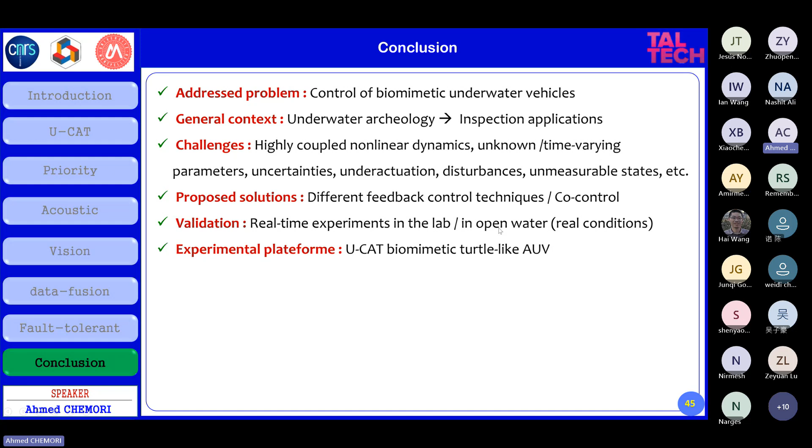That's all. Now let me conclude today's presentation. I tried to present the control problem concerning biomimetic underwater vehicles. I introduced the general context for the application we targeted in our study, which is underwater archaeology for inspection applications, and different challenges in terms of vehicle design and control. I showed some proposed control solutions depending on the control itself and the feedback used, whether it's the camera, the pinger, or something else. We validated in simulations, but much more in real-time experiments, in a controlled environment in the lab and also in open water, and we validated all the controllers on the UCAT underwater vehicle. To finish, I want to thank my colleagues from the Center for Biorobotics at TalTech University in Estonia.

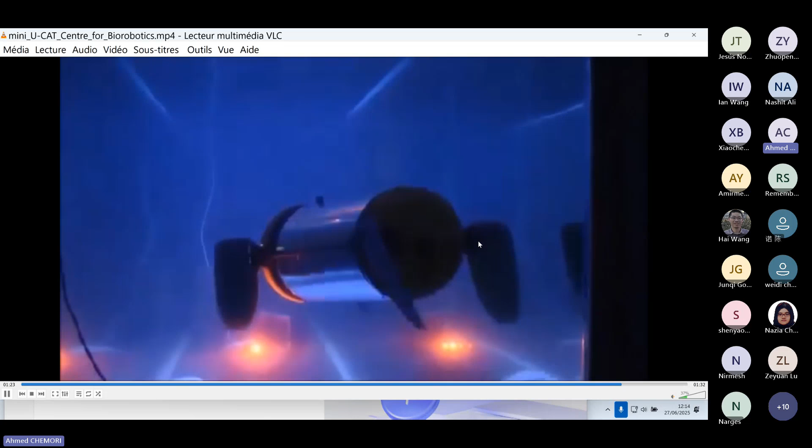After that, for certain reasons, we added a DVL just to explore other control schemes and also other measurement devices. But to go back to the question, up to now, it's not commercialized yet. So it's still in the lab.

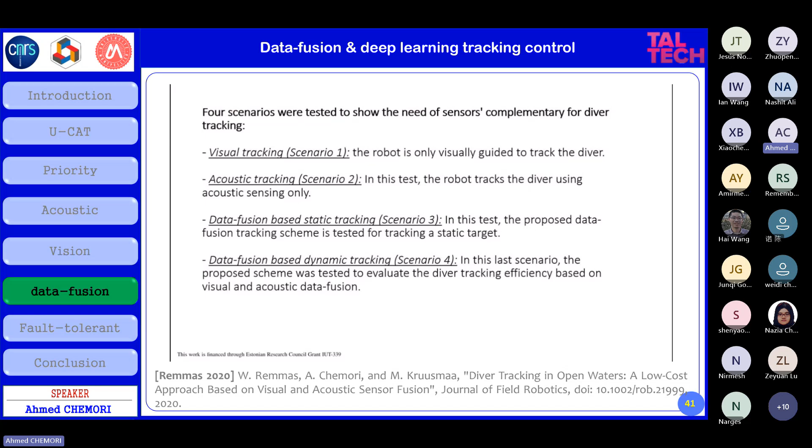First of all, we experimented with the pinger alone, and we detect the pinger. It's very easy to detect the pinger. However, the diver is difficult to detect. So we didn't develop a new deep learning algorithm. We use an existing deep learning algorithm to detect the diver, and it's a neural network.

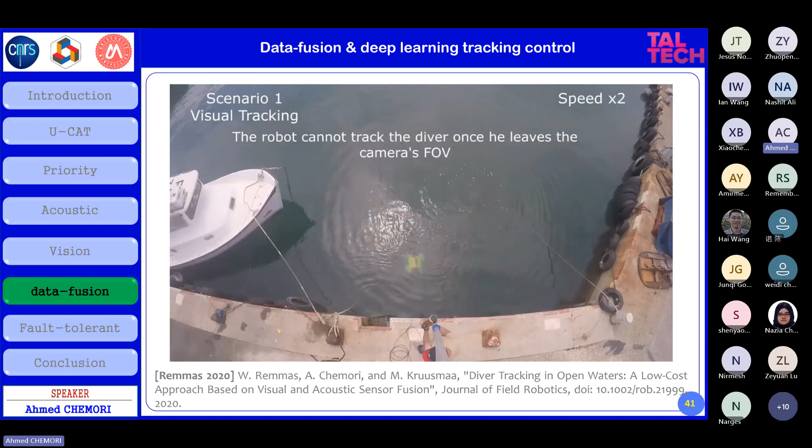I remember when we did the experiments for this control scheme, the PhD student who implemented this downloaded a lot of videos of divers on the net. And he did the training of the network using these videos. He left the network working all night, maybe 10 hours of training. And in the morning, we take this trained neural network and we test it in real conditions. And it was really fantastic because it was working.

So if you want to know more about what we use exactly as a deep learning technique, the details, the parameters, and so on, I invite you to have a look at this paper, published in the Journal of Field Robotics. You have here the details, the title, everything. The paper can be downloaded on ResearchGate. If you have trouble finding it, just send me an email and I will send you the paper. There you can find all the details about the deep learning part that we used in our case.

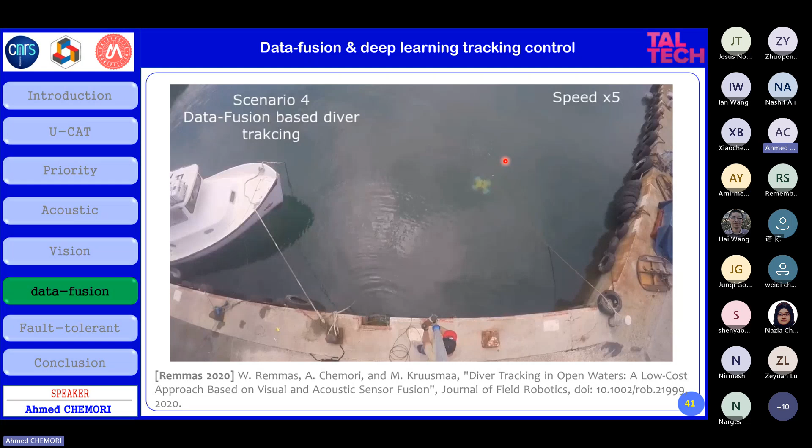What I show you is just a video that summarizes the final result: the diver is moving and the U-CAT is following the diver. In this scenario, the bad thing is the conditions, because the visibility was not so good. If the diver is at 1 or 2 meters, it's okay, we can see the diver in the field of view of the camera. But if the diver is at 3 meters, we cannot see the diver. This is the big problem.

This deep learning algorithm is active all the time, in real time, and it screens the images from the camera. Once the algorithm sees a diver in the field of view, it says, it's a diver. And automatically, the controller will switch to the configuration where we use both the pinger's acoustic signal and the images of the diver, and it tries to follow the diver. If the diver turns right, left, or goes away, we forget the diver and switch to the case where we rely 100% on the signal from the acoustic pinger.

That's it. Is it clear? Yep, it's more clear. Thank you, I will go through the paper.